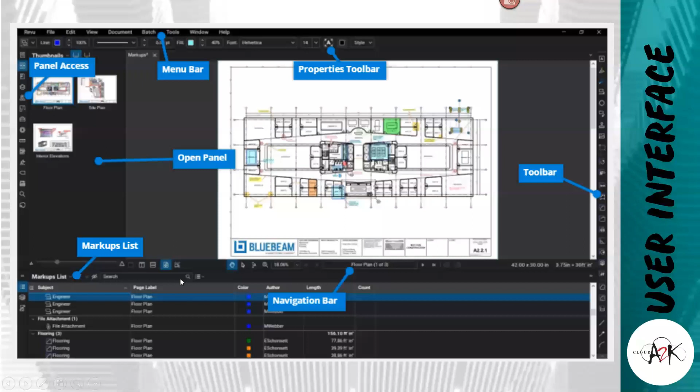That's the basic interface, which we all know. So you've got the panel access, menu bar, properties. I'm not really going to go through it from first principles, so we're more showing some tips and tricks, but yeah, I will show what the things are and how to use them as we go.

So it's a PDF system, so that can contain all the metadata. So even with 3D drawings and the like, you can put hyperlinks in there, bookmarks, file attachments. So you can put a lot of images in as well and hyperlink to those images. So it becomes a real good collaboration tool between the office and somewhere on site where they can put a photo straight into those drawings and then you can see the full site.

It does deal with 3D data as well, so you can create from Revit a 3D PDF. So I may show that as well.

So I've got a couple of tips from clients that came in. One from Scully Song Construction, Dennis Havworth there. He said that one of the great tips is with a programmable mouse. So if you use a programmable mouse, you can have all the buttons assigned to sort of redo, undo areas and perimeters and the like, and you can use the hotkeys to its full utilization.

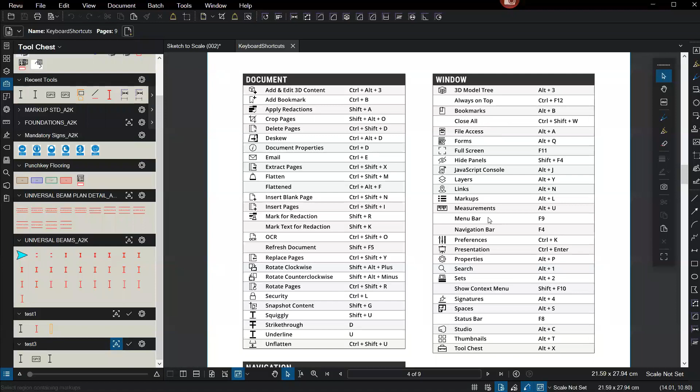So I will flip to Revu now. And if you do go under the help tab at the end, you will find that there is a keyboard shortcuts guide. So if you do use this keyboard shortcuts guide, you'll find it's got a lot of the keyboard shortcuts through there. So these are a lot of the inbuilt shortcuts, and you can assign these using a programmable mouse to what you want it to do. So everything does have a hotkey to it. So you've got all your sheet controls and document controls, all your window controls, going through to your measurement tools as well.

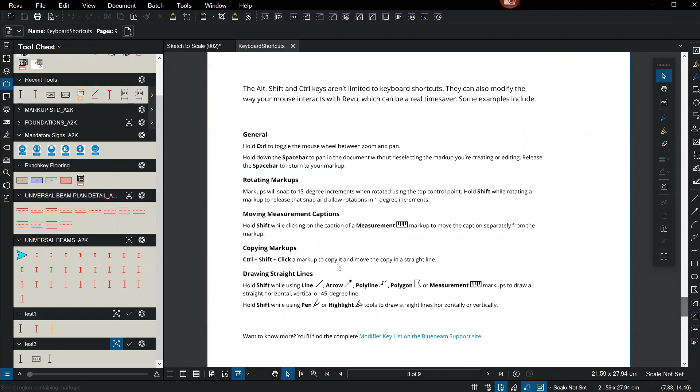So this comes straight from the Revu. These are the standard settings, and you can get that list through your help, under the help and keyboard shortcuts.

If you go through the tools and tab menus as well, you will see all the hotkeys are through here. Especially on your tools and markup tools, a lot of them use common sense ones. So P for pen, H for highlighter, Shift E for erase, L for line, arrow, etc. A lot of them are quite straightforward.

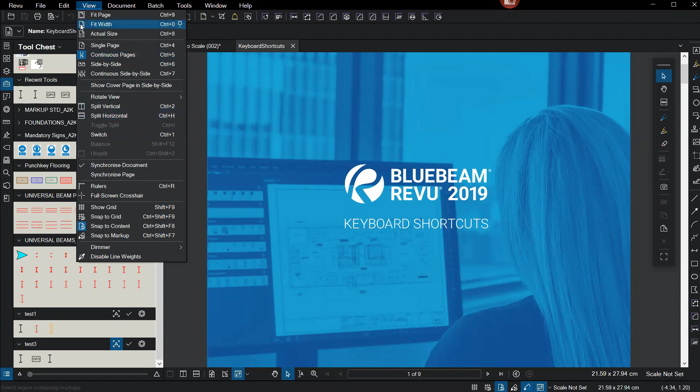You can see all the controls through there. So it's good to use the hotkeys to make yourself a bit quicker, and it's good that they're locked down to a degree. These hotkeys are generally available to anyone who uses your Bluebeam. They're all the same hotkeys, which makes it quite useful.

So that's just with the programmable mouse. It makes it a lot easier if you've got all those buttons on your mouse, and you can be more efficient that way.

Tip number 2, so I'm going to go through this a bit more in depth. This came from Tass Construction Group and Josh Jones. So you can sketch to scale.

A lot of people do use these items to actually draw full drawings in Bluebeam. But Bluebeam isn't a drafting software, like a lot of us are probably coming from things like Revit, AutoCAD and the like. It's not really meant to compete with them, because their number one job is to do the drafting tools.

So these are tools that are inbuilt in Bluebeam, where you can use them to produce sketches. You can produce title blocks, different items that you have, you can reuse, and it's all to scale and applying that scale. So we'll go through that a bit more in depth.

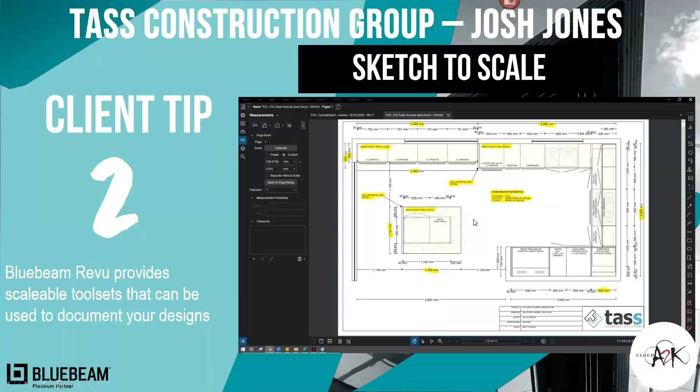You can see here as well where we've got all the items to scale. We've measured off perfectly, and all those items just work. So I'll now go through and show some of those in actual demos.

So I'm going to go to Bluebeam, and I'm just going to start a new project, so I can start a new PDF. We can put in templates as well, so if you create a title block sheet, you can save this as a template and have a sheet come up through there. But I'm just going to start a new PDF from here.

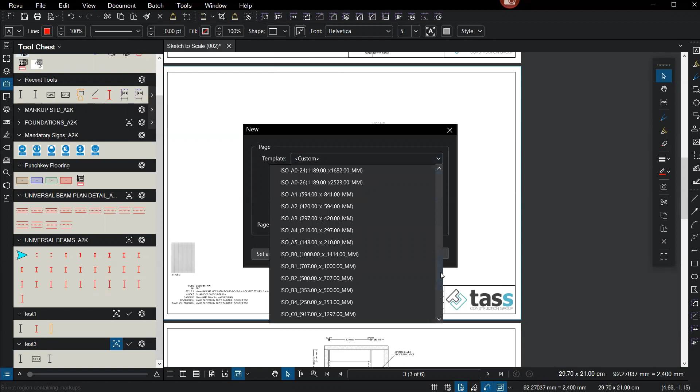And it will come up with our size. I'm just going to use an A3 sheet, so you've got the ISO A3s in there. You can change these sheets through your administrator, and you can have it as a portrait or landscape as well.

And that gives us our basic sheet there. Now, what we haven't done is applied a scale at all to this sheet. So this is the panel access through here, and the first thing I want to do is give it a measurement.

So I can calibrate this sheet and give it a 1 to 100 scale, with 1 centimeter set. So what I can do with this is actually start to draw, and draw to scale as well. Now that I've got this calibrated, I can use my tools here and use sketch to scale.

This will allow you to actually draw lines and use the drafting facilities in Bluebeam. So if I do a polyline sketch to scale, I'll see that if I drop that line there, I can give it a length, and that will be a to-scale length.

You can hold shift down as well, and shift will snap it to a degree. So you can see there, if I hold shift down, it will snap to that 0. If I don't, it has that free rotation, but it does still snap. If I hold shift down, it will snap to like the 45 degrees, so we can see there it's snapped to 45 degrees and 90 as well. Shift will make it snap around to those 45-degree angles.

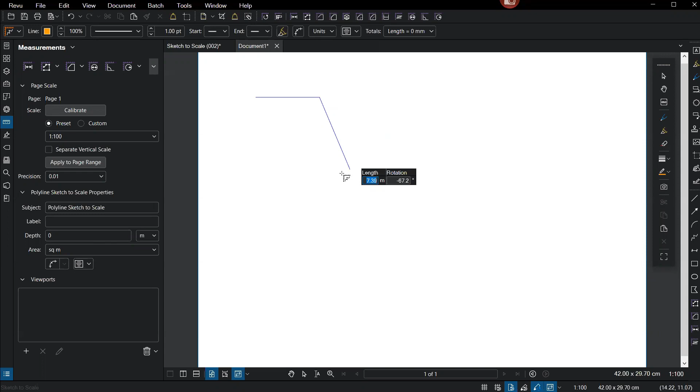And then you can start to draw something that's 6 meters long. Again, by holding shift down, you can snap it down and make that like 10 meters down. So again, it's just L for line, shift down. I did just use a plain line there, but you do need to use the sketch to scale tools, so from sketch to scale, you've got your polyline through there.

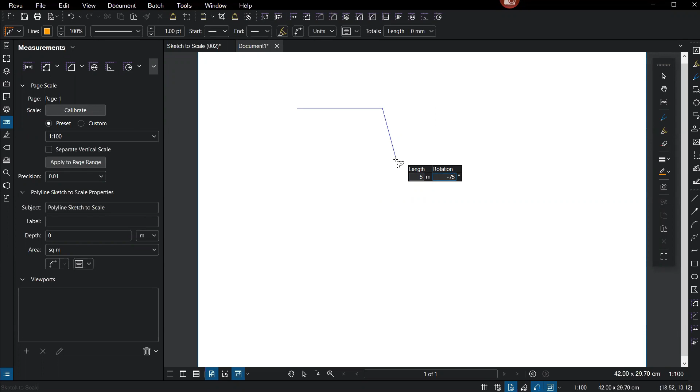And you can tab, so if you wanted to give it a real angle, I can see that that's snapped there to the 5 meters. If I hit the tab button, that will then allow me to make that minus 75 degrees. So you can see how I've got a line there that's come from that point, which is 5 meters at a minus 75 degree angle, and hit enter to finalize it. And that's put that line in.

I hit escape again out of that, so make sure that you hit enter instead of escape.

You can do polylines and rectangles as well. So if you did want to do a rectangle, the same sort of process works. You pick a point, it does stretch out to the different degrees there, and you can use those items to go 10 meters by 5 meters, and by just tabbing through and hitting enter, it will place your rectangle.

You can obviously change all that as well. So if you wanted it to be a blue box or a thicker line, dashed line, etc., or even through your manage settings put a stormwater line in if you wanted. Changing the thickness as well is all through here.

So that's how you can simply do something to scale. What you can do is use this as a full drafting tool. So what I'll do is make this a bit of a cupboard - sketch to scale, polyline again.

What I can see is I'm not really picking up a center line there, so what I may need to do is go into my Revu preferences, and make sure that my tools, when I go under sketch, it's under general and the snapping.

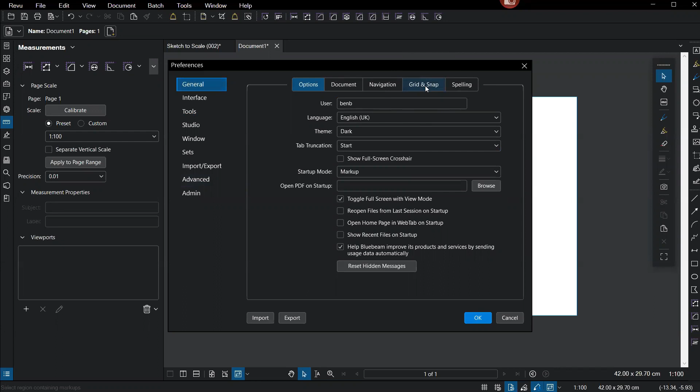I can make sure that we're going to snap to midpoints, snap to lines, snap to markup, etc. This is a markup because even though they're lines, it's not really content, they're more markups on the sheet, so I do want to snap to markup. I can see here I do have snap to midpoint selected and snap to endpoints and intersections. So what I need to do is actually snap to my markup.

So if I click that snap to markup there, that's where if I now go to do my polyline to scale, it will snap to that midpoint. I can see how it's picked off that midpoint right there, and I can snap it to that one.

Stop hitting escape and keep hitting enter. So again, sketch to scale, midpoint, midpoint, and enter - and that's put that line in. Again, sketch to scale.

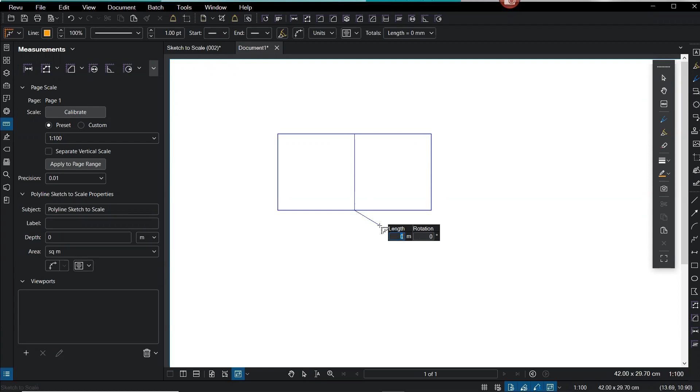You can also do ellipse and a circle. So again, I'll go through tools, sketch to scale, and get ellipse. And with this, again, you can see how it's sort of got that magnet in there, so it will snap to the midpoint.

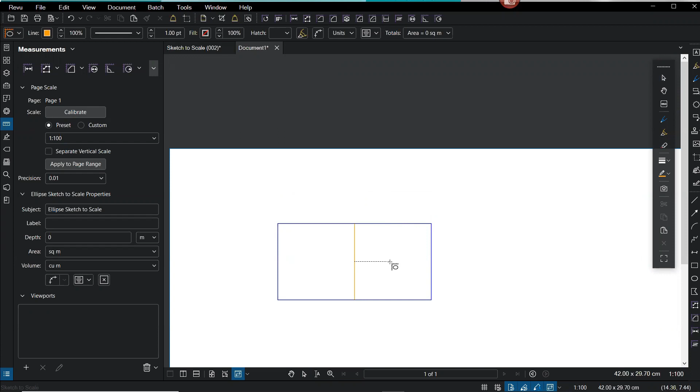And I can get a radius in through here, so that's where I can do an actual radius of 2.5 meters. The shift key as well works on that to sort of snap it between, and you can also get your tool in through there. So I can put that in there and enter. So what I can do now is easily save that to my toolbar.

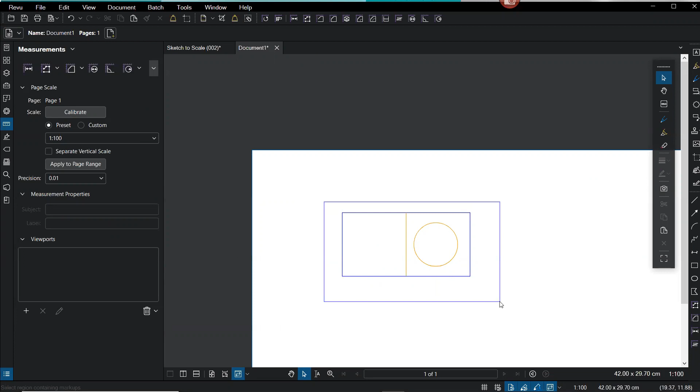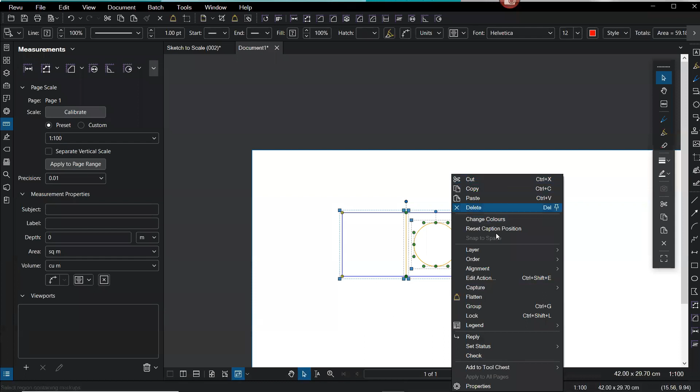So if I select all those items, what I can do is group them. If I right click, I can group those items. So one of the tips to use in Bluebeam is: if in doubt, right click it out. If you right click, you generally get all the actions you can do on this. So you can make a group of that, and I can right click and add that to my toolbar as well.

So if I add to tool chest, I can add this to my tools. And now I can see, through your tool chest, you've always got your recent tools, and I've just added that into my tools as well.

So to make a new tool chest, if you click under the tool chest, you can go to manage tool chests here. I've got a couple of test ones - I'll just deselect those, and you can manage a tool set. If you go in here, you can import new tool sets, export tool sets you've made up, and you can add and start new tool sets.

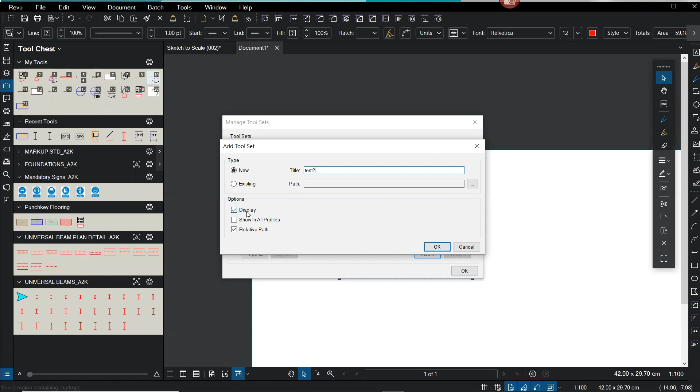So if you go to add in here, I can start a new one. Again, I'll just call this test 2. You can decide here if you want to just show it in all profiles. If I currently want to display this tool set, which I do, I put it in through there. So this is my test 2 tool set.

It asks me if I want to save location, so I'll just save this to my desktop and save. Okay, so now I can see I've got this test tool set here.

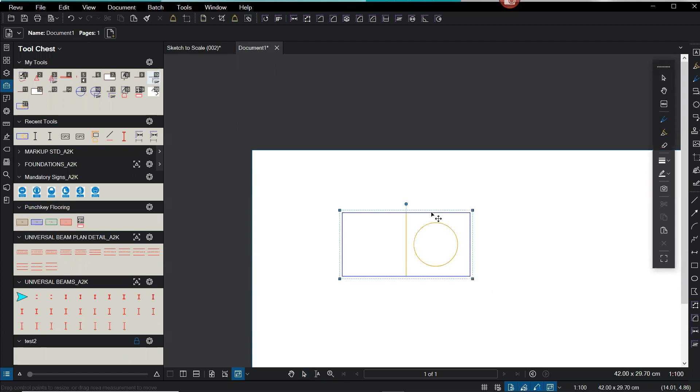Now there's a few different ways to add things into the tool set. One, I can grab the item itself, and as I showed before, you can right click and add it to your tool chest. And there I've got my test 2.

One of the best ways is always to go through your recent tools, and again, right click there, and you can simply drag and drop it. I don't have a lock on it, so I'll put a lock on, and there we go. So I've got that item now in my test 2 set there.

So now if I want to reuse that at any time, I can just bring that in.

Through the properties as well, so we have properties of each item. If you click on the item and go to the properties, so that's always the cog there, you can right click through, and you can start to fill in this data.

So you can give it a label if you chose to, or get an area, etc. And with the label, you can change the units, so I could change that from square meters to square centimeters if I chose to, or whatever, all through here.

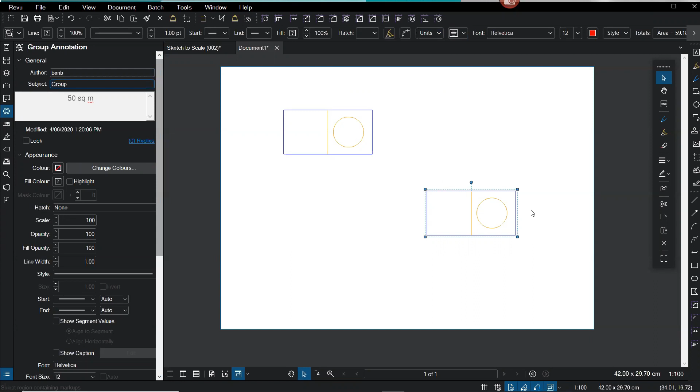And that's the group, so these are lines in a group. These aren't area dimensions or anything, they are just lines that have been sketched to scale.

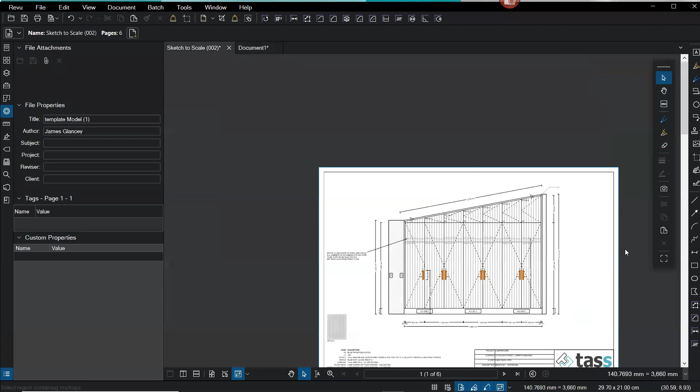So what I can do now is I can go to a new drawing. I've got this project here, which came from that TASS construction group. And all these items have been generally drawn in Bluebeam itself, so they've got all the text that they've used, their line styles and their handles, and they've all come in through there.

So what I could do is if I went to my tool chest now, the first thing to do whenever you open up a drawing is to check the scaling of it. So always go through your measurements, and you can calibrate the job.

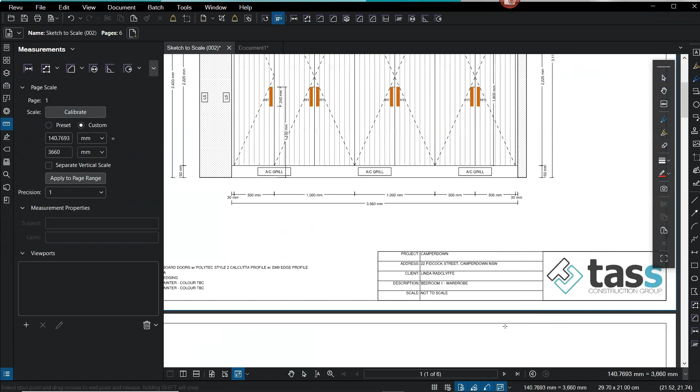Now, when you hit calibrate, you do get the lines where it will snap to the content. We can see here, this doesn't have an actual scale set on that. So you're always better off to look for the longest dimension you can find. I'm going to go off this 3.1, I might go 3.5, that is a fraction longer, so obviously the longer the line, the more accurate it is, and I can select that point.

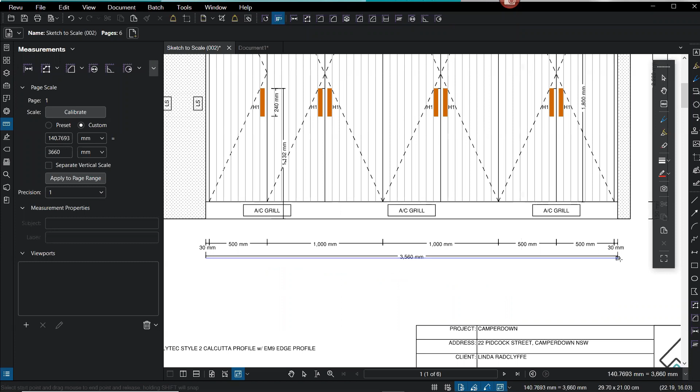Select this point at the end here, and then I can make that. So it has measured it off as 136 millimeters. And I'm going to put in here that it's actually 3,560 millimeters, and apply that scale.

And now that I've applied that scale to that job, again, if I go to my tools and sketch to scale, if I do my lines, I will see that they will fit in.

So I'll just go here, and just to show how it works, I'll do a line from this point, and if I do that 500 mils, we can see that that will be the right length. So that's put that in at exactly 500 mils, so we can see how that sketch to scale is working already.

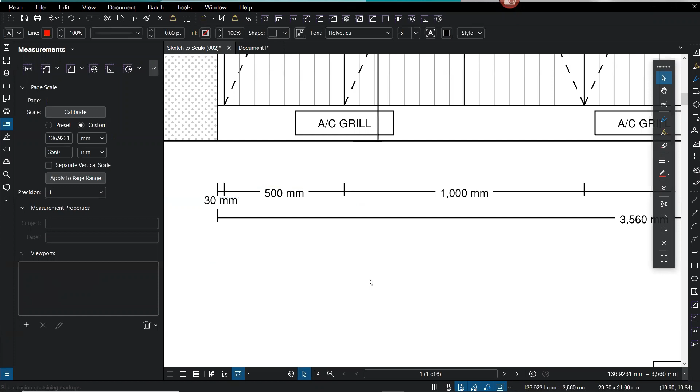And if I go to my tool chest, what I can do is actually apply a scale or set a scale to this. So if I bring that in now, we can see that's brought that in at the right size.

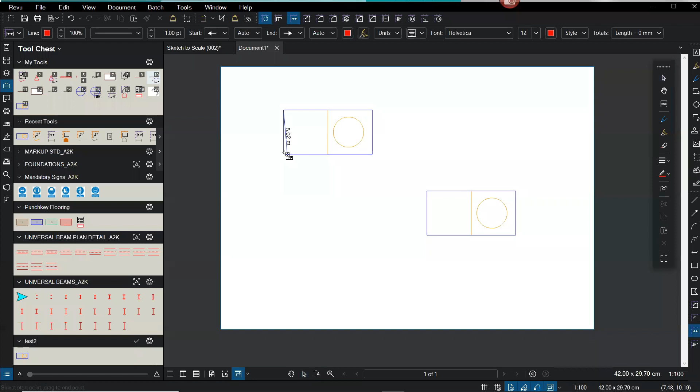So I'll go back here and I will check that dimension. If I just do a measure, it's 5 meters there, and we can tell in here it's brought that in miles too small. So that's actually 5 meters long through there, so we do need to apply a scale to this.

So that's where we can set the scale.

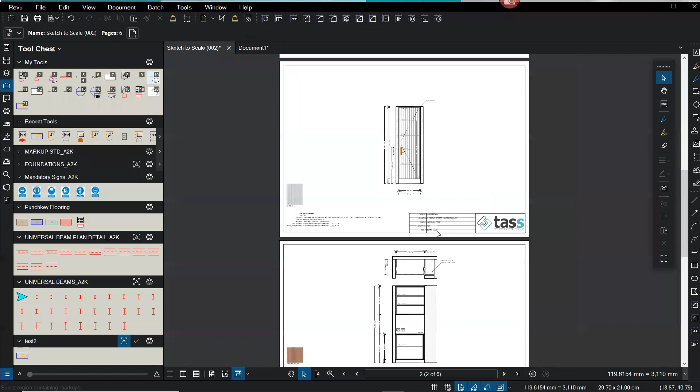And if we now input that or calibrate that scale again, and now if we bring that in, let's grab the scale. We can set different viewports on the drawing itself. So these are all at the one scale.

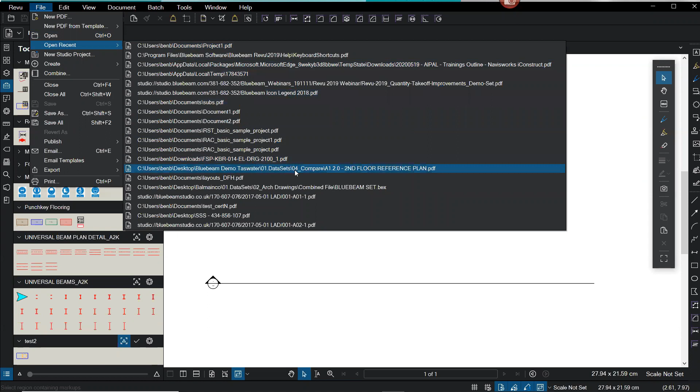So if I open up one of my recent drawings through here, if you do have a heap of scales on a different sheet, you can put viewports on. So if I had this at 1 to 100 and I had another scale down here at say 1 to 20, I can add different viewports to the sheet.

So to do that, you go through your measurements here and you can add a viewport. So this calibration has stayed on this whole sheet here, and I can apply that to a page range as well. So I can say that I want that selected to all pages. And I can also add different viewports.

So if I add a viewport here, it will come up and it will ask you to define a region for that viewport. So say if I had an area in this corner here, and you could make that go to a preset scale of 1 to 100 or 1 to 10 in that corner and apply.

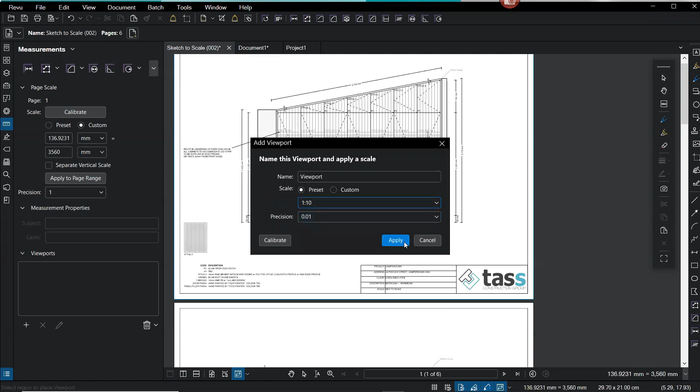And then, so that sheet there now has 2 scales to it. So the general sheet, when I measure here, you'll see that it will come up as, so what I'll do is if I do a measurement here again, that will come up as a meter.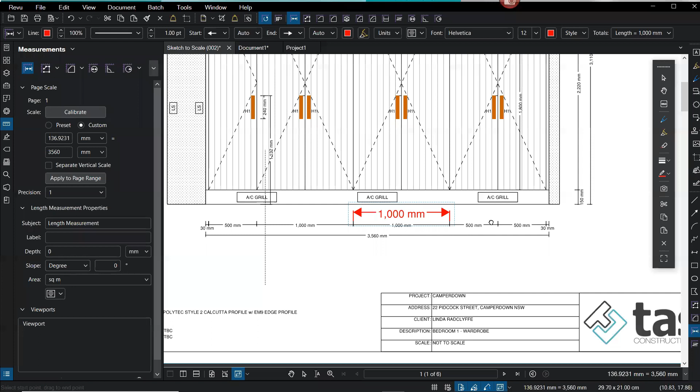And if I do a measurement in here of about that distance, we can see that that's coming up as a lot smaller. So even if I do that as a bigger dimension, it will pick up the different scale through there.

What you can do is bring stuff across quite easily from Revit and the like. So in Revit, this is a Revit file I've got here, just a simple Revit file. So I've got all my columns in there. So you can use this to bring the different columns in. So you could bring in like a 310 or a 360, bring those 2 columns into Revit.

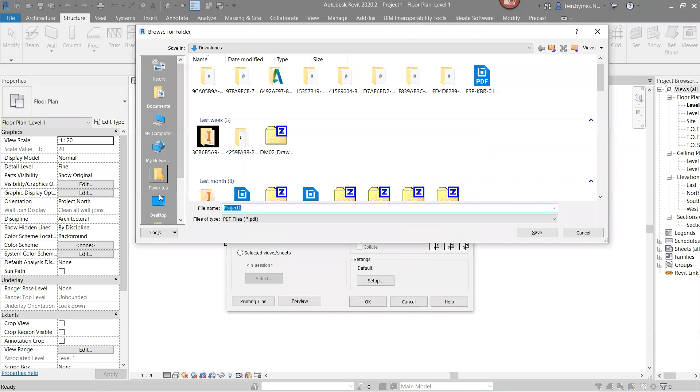And then from here, just by printing to your Bluebeam PDF. So through that, and I'll just put that to my desktop.

What I will do is I will set a scale on this. We probably don't really need to because we can set the scale always in Bluebeam itself, but it's a good idea just to set it through here as well. So I can put a zoom in here and set that at 100%. I'll center that as well.

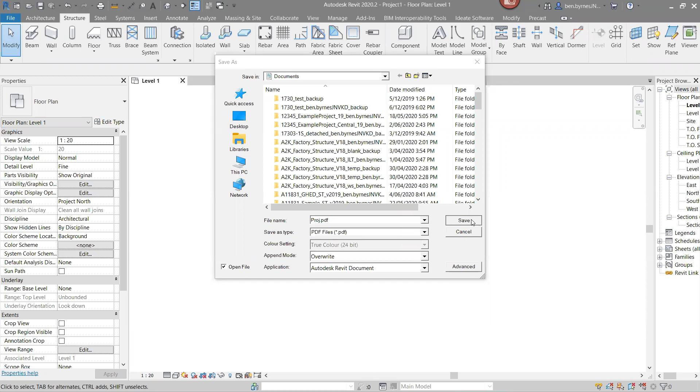I'll save that to my desktop. And I've got that set through my administrator that it will open straight up. Obviously, when I printed it, I'm on a bad sheet size and haven't really set the scale. So again, I will just print that again and print it to fit. So current window set up and make sure I just fit that to page. So I'm not too worried about the scale in here because I will sort that out in the Bluebeam itself.

So now I can see I've got those two members in there. If I did a measurement, say this one here was a 310 UB, I believe, I'll just check that. So 360, and the distance of that is 360 mils, 359. So I've got this in here.

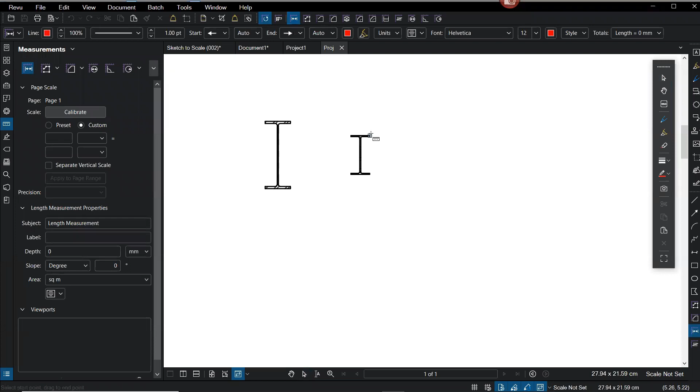So when I go to measure that, you will find that it will ask me. So it's coming here at the wrong scale. So you can see that whenever I go to do a dimension, it does come up with that warning that you need to calibrate the drawing.

So again, I will calibrate this, grab that distance and make that 359 millimeters. And apply that, and I can see that that's grabbed that right size now.

So now that I've got that, what I can do is I can grab these items straight out. So by using G, which is our snapshot, and again, that is also through tools. So you do get it through there, just that drop down snapshot. And I can grab that beam through there.

If I go back to my sketch to scale, I can paste that item in. And what I can see is that it hasn't come through at the right scale.

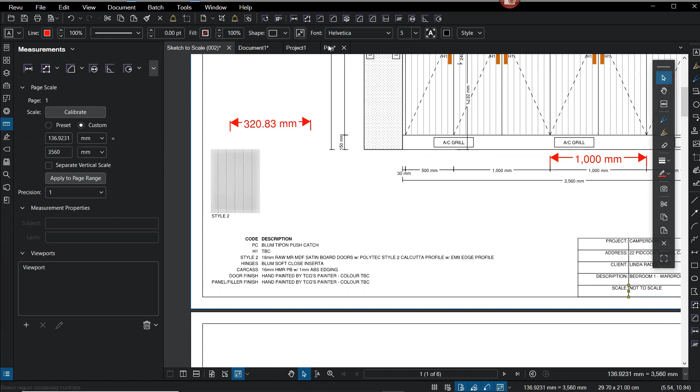So what I want to do is when I go back to the other one, so if I go back to project here, when I go to my toolbar, I'll see that I will be in my recent tools here. And what I can do is add that to my toolbar. So if I drag that on,

then I can select it, right click and go add to tool chest. What I will do is I will quickly just make a new tool chest. So if I go under tool chest and manage, add a new tool chest. I'll call this columns.

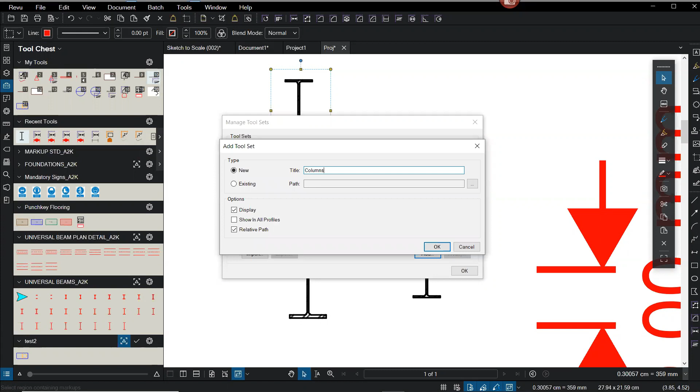And okay, now I can add that to my columns tool chest. So I'll see now I've got my beam in there.

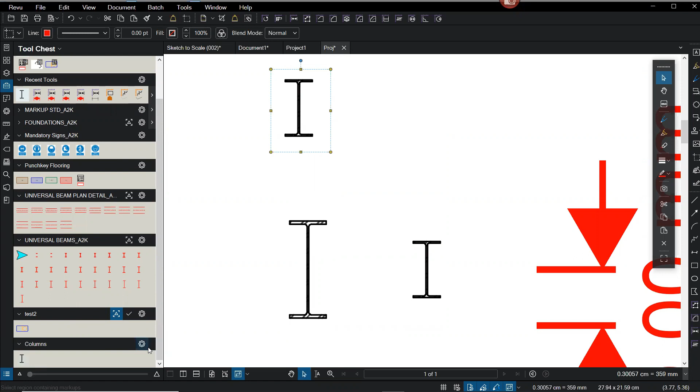So if I now set a scale on this, what I do is I go to the project, and then I can set the scale. Oops, I'm in the wrong project. Go in here.

I can calibrate this scale to the correct size. Yeah, I've sort of gone around a bit. And you can put all these items in. So once you do get the sizes there, you can have all your beams and plans in, so you can draw like plans and beam details.

And it's a good idea at this stage, when you change it, to change it to a detail. So if you change that to detail, then through the name of the object you can have all your sizes through there, and the same with your universal beams through here. So if I change that to a detail, I can see that I've got all the correct sizes there.

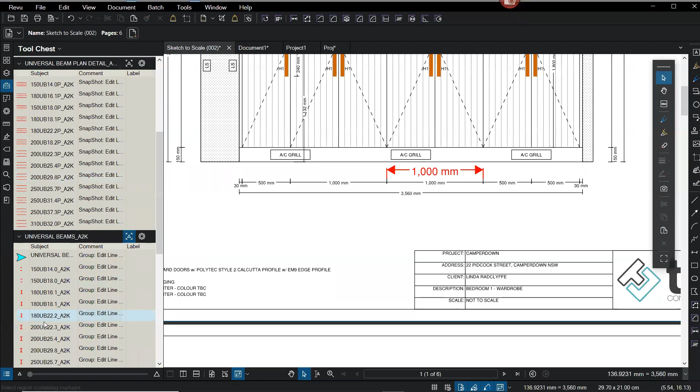And then I can bring these items on. So I've got a 180 UB there, which I can put on, and I've also got a 310 UB 40. So if I place those on, you can see that they're coming on at the right scale.

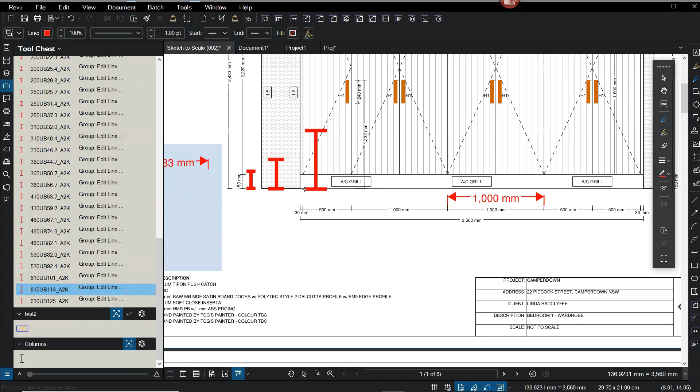So this is where you can quite easily create a to-scale construction drawing. You can then use these as well to do like basically a simple sketch to scale, where you may have a beam coming onto a column.

You can use all those features through there. So you'll see if I measure those off now, that they'll be the correct scale.

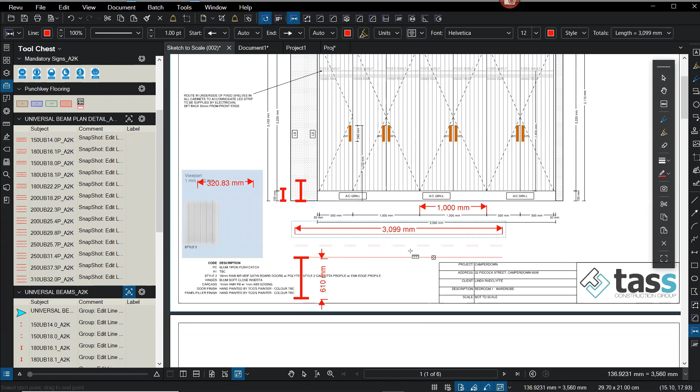And through there. And remember, you can always hyperlink. So with an item, I can add an action to an item. So what I can do is I can select this beam, for instance, and I can put an action on that, and I can hyperlink that to a catalog or etc.

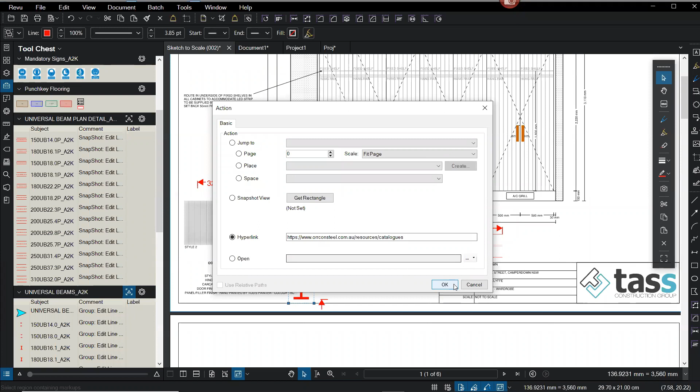Of that steel member, so I'm not going to do that now, but if you had the steel catalog, you could go here and you could point it to that exact catalog. So by grabbing those data sheets or those building products, you can grab that catalog, put that in as the hyperlink, and then it will come up with that little action symbol, which you can then follow through to that website.

So you can do that for everything. You can also hyperlink to sheets and details. So what a lot of companies do as well is when they have the plan and elevation, you can hyperlink those items by putting in your text or your label.

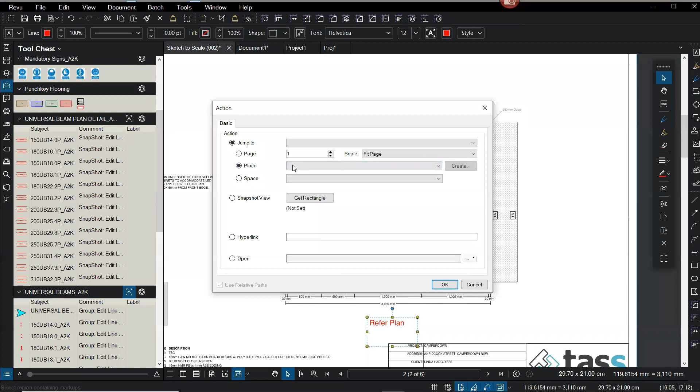So I'll just go to markup and text box, so I can have that set there as plan. And again, I can select that and hyperlink that. So edit action, and I can point that to a different page, so I can have that jump to page 1. I think because I'm on page 2.

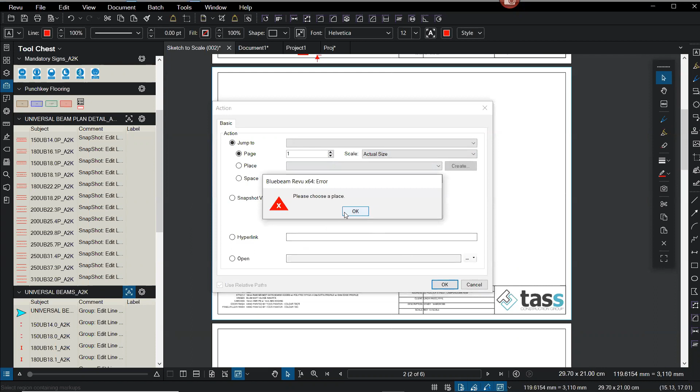Yeah, so I need to create a place first. What I will do is I will jump onto the chat for a bit. So I have seen some questions come in.

Can you create a BOM from the hyperlinks? Yeah, I don't really, the question there, so you can create a list from it. You'd probably need to go through the markups down the bottom here and get those, to create - I think you're more saying like as a shop detailing thing.

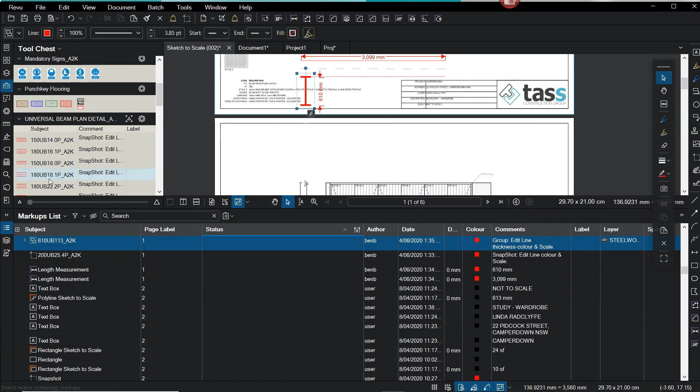So with bringing in these beams, they do come in as items, so you can get these out. A bill of materials, you could get a count of them. So like for each one I put on, say if I did place another one of those, I'll just go here to place another steel beam. So if I place a 180 steel beam there, you'll see that they're coming up in my markups here.

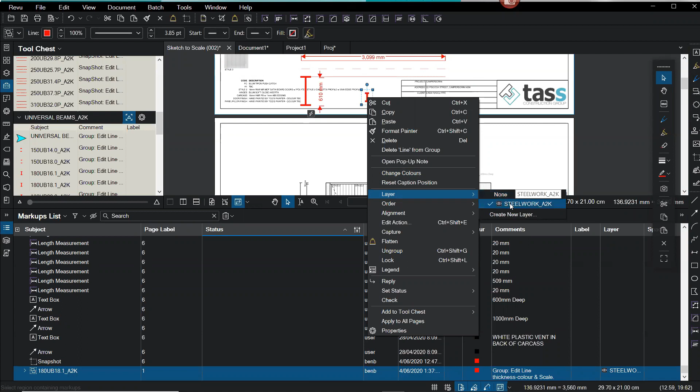What you would probably want to do is add them to a layer. So if I right click, I can put these all on a layer. So you can use these sort of as per, almost like an AutoCAD layer. So all those, they've gone on the steelwork layer.

So what I can do is I can then filter my markup lists, so you could really sort of trick it a bit and make sure that I only saw the steelwork layer ones, and that would give me like a very rough sort of bill of materials and a count. So again, if I do pull in like another 610 UB 113, I'll see now that I'm getting - I'll put that on the other page.

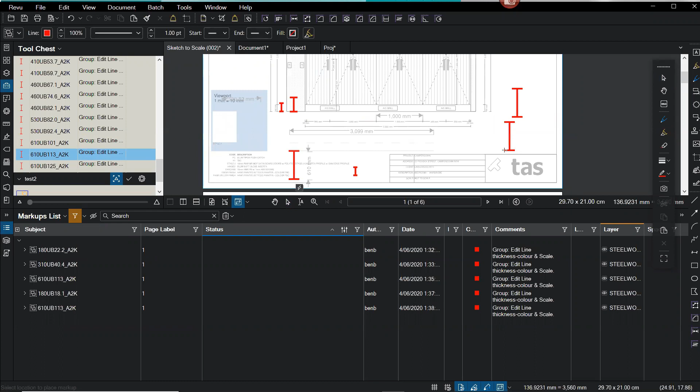That's why it's come there on the page, but you would need to sort of play with the markups and actually mark off the counts. You can see if I did put in another 310 or another 610 UB, it's actually created two separate ones, like they're two of the one. It's not really doing that count as such because they are separate markups, so as I add each one in, it's not really counting them. But if I exported that out, I could get it to sort of show as a count, so it'd be quite rough as a bill of materials.

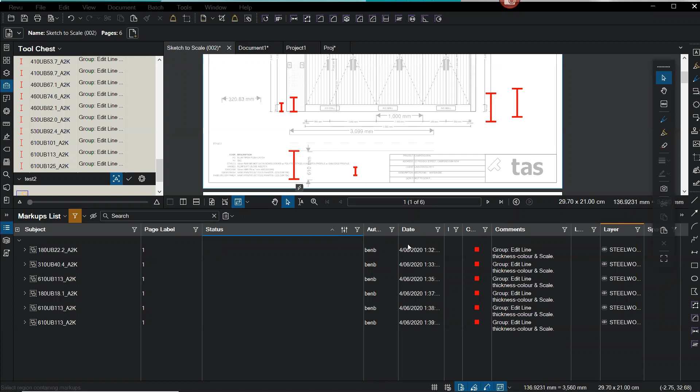You can isolate stuff through the markups here by filtering your markup list. If I take those filters off, you get every markup that everyone's put on. Through your markup list at the bottom, you can jump to every item as well, so you can see where people have done certain sketches and the like through there. That's where it's a good idea to use subject, status, and all these features through the markups list, which you can change these columns as well. Any data you wanted to put in, you can make custom columns, it's all through your columns, and you can select what you want to show.

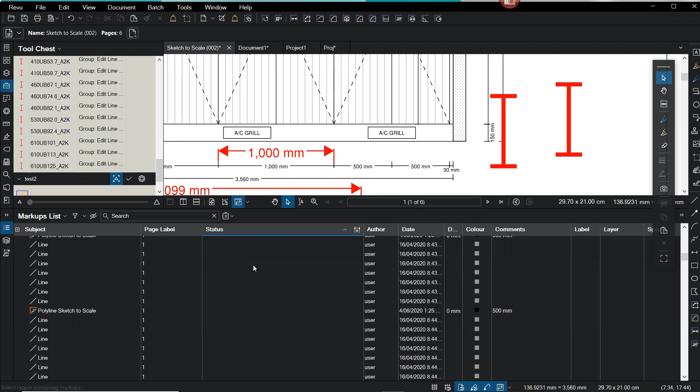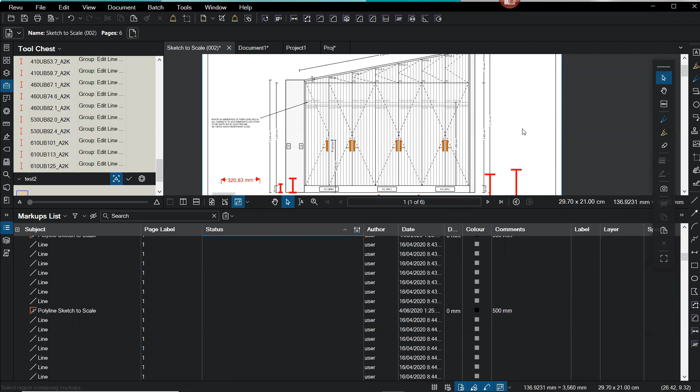You can also manage these columns and make new columns, even custom columns with formulas, using simple Excel formulas through here. That's a good way to do areas - I won't go into it here - but that's where you can actually assign dollar values to different areas. So you can assign a numerical value to an area. For tiling, you can have it as $2.50 a square meter, which is pretty cheap. So you could have that as your area and then have the count through there where it would times out the area and give you a value. That's where a lot of people use this for quite comprehensive quantity takeoffs.

Yeah. So yeah, I wonder if there's a few questions in the chat as well. Some people are using chat.

So yeah, dockable menus, yeah. So you can, yeah.

So yeah, just with the sketch to scale on a drawing PDF, yeah, you don't really need to apply the template to it. Do you apply the template to it prior to sketch to scale? Yeah, so you do need to just set that through there.

So yeah, what you can do as well is through the documents, what a lot of people are doing now is setting up dashboards and the like. If you set up a dashboard, you can then use those hyperlinks to point to different items over there. So to do that, I'll show a quick way to hyperlink to stuff in a set.

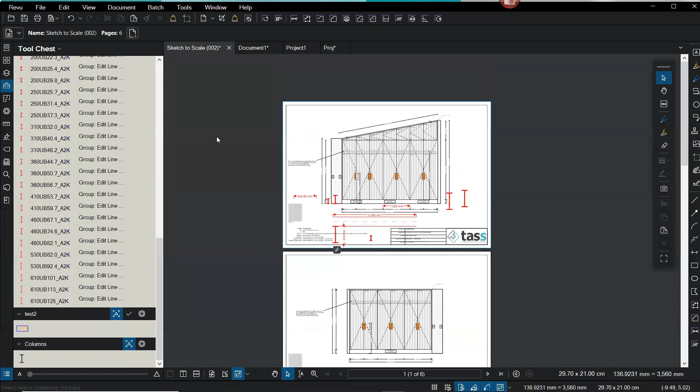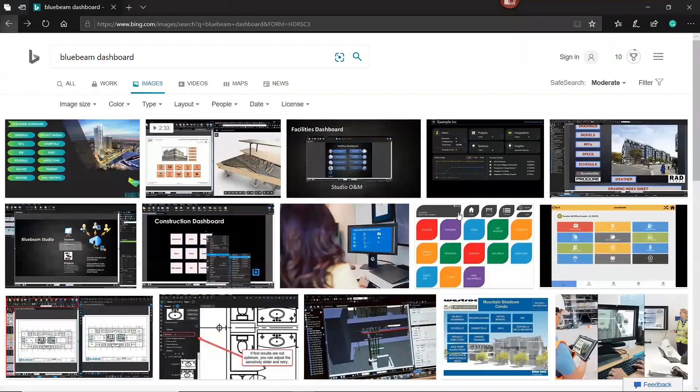You can use like PowerPoint or the like, or get a simple image, and from then you can hyperlink areas. So I'll just open up an image that I have. If you search, if you've got 'Bluebeam dashboard image' or go to something like that, there are a lot of ones you can just get off the internet. If you go to images, you can get a digital dashboard - I won't use the Lendlease one - and you can simply copy and paste that dashboard.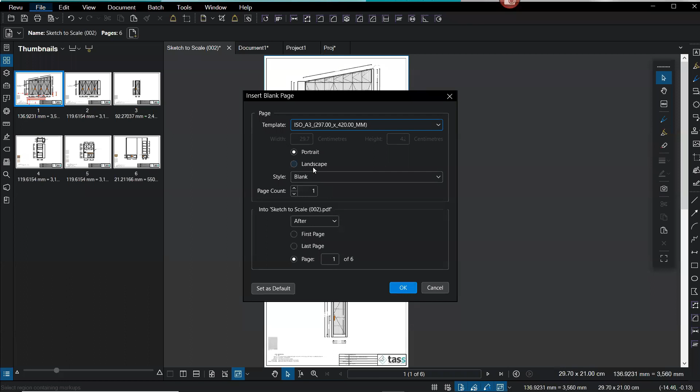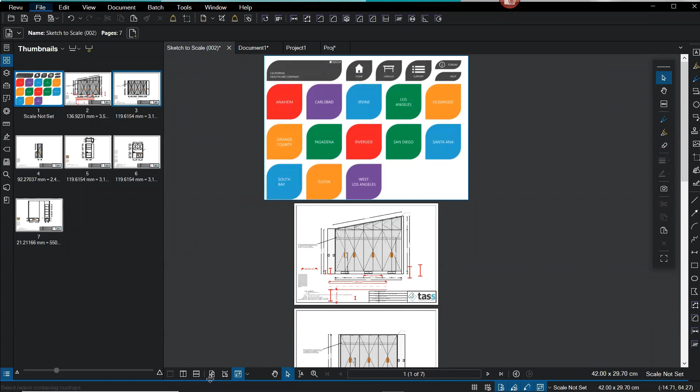So if I now paste that onto a new sheet, I'll go to my sketch to scale project here. What I can do is at the start, add a new sheet, insert a blank page, make it A3 size, landscape, and okay. I can move that - going through the tool thumbnails here, I've moved that to the front page. I can put on my dashboard here and size that to fit, and that's now become my front page there.

You can use this as a simple hyperlink area. What you can do is go to your tools and go to hyperlink. We're not really selecting the area because this whole image is part of the image, so if I right-clicked and put an action on this, that would action the whole area. What I want to do is actually action specific areas on this. So if I go to tools, then hyperlink, it will come up with a little crosshair so I can make that go to a certain area. So I can grab that area there, so that I want this to jump to page 1, and okay.

Or I can, so that will take me to that area on the page. You'd obviously probably want to point that to a different sheet.

So if I went to tools again, markup and hyperlink, shift and H for hyperlink, you can grab different parts of the page, then hyperlink or open a document as well. So you can path it to open a new folder. This is where you can use Studio Project to link it to a new folder or a new file and point through to a set of documents.

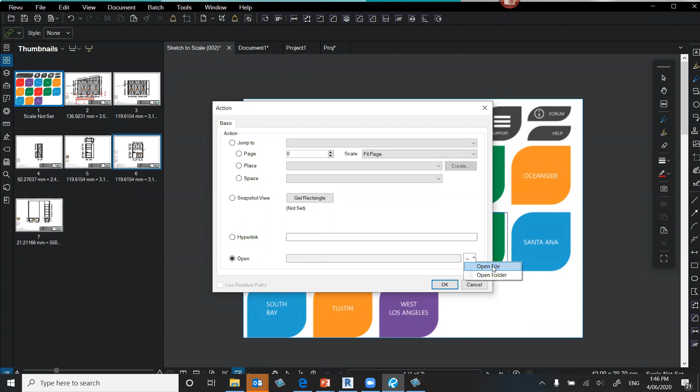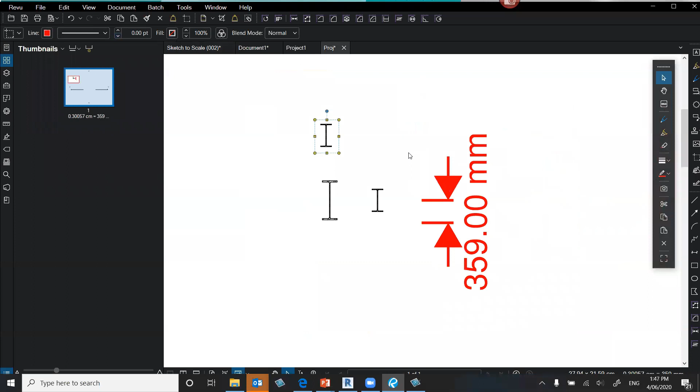So I can get that to point to my... then if I select on that, that will actually open up that project. So it's quite a good idea to have one of these set up for your project where you can have it pointing to different documents and the like through your Bluebeam.

So that's dashboards, and you can use anything, you can make up your own image. You'd set that up and have your project home catalog, point stuff to the forum as well, and to a help, you may hyperlink that to your intranet help, and you may also have links to the project as a whole. You could link to photo sites, etc.

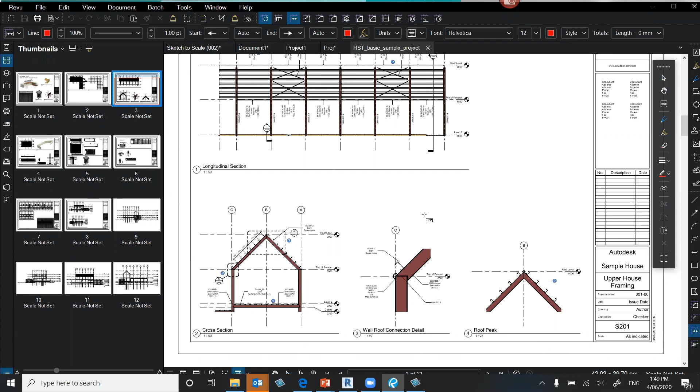So this is just a drawing that's coming from our set, it's the Autodesk sample. What I can see is I've got a few different scales here, and no scale set through the thumbnails. So as soon as I go to do any dimension, it's going to ask me straight away what to calibrate, and let me do the dimension. So you want to find out - I do have a scale there, but I can't really trust it because these may have been printed out too big or too small.

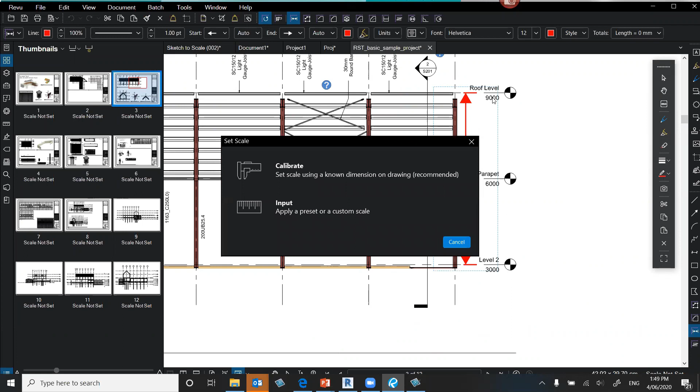So if I do a measurement from there to there, I know that I'm going from 3 meters to 9 meters, so I can calibrate. You do get asked that straight away, and I can put in 6 meters and apply that scale. So that's applied that scale to this whole sheet.

So if I go to something that's at a smaller scale, I can see that's at the same scale, but if I go to 1 to 10, again I can do that measurement on it, and that's not going to be an accurate measurement. So it's come up saying I've got a meter square wall, which it's obviously not. That's where you'd have to apply your viewports.

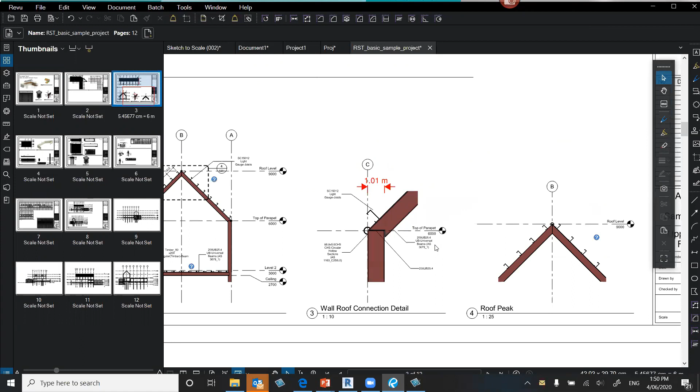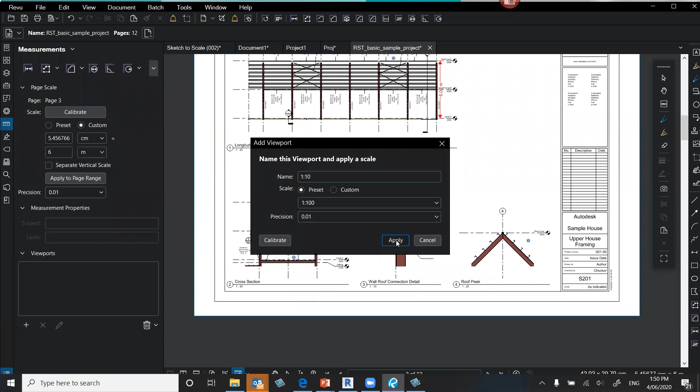So to do that, it's all under the measurement tab under the panel access, and you can add a viewport, define these different regions. So I'll put in there 1 to 10, but it's not going to be a 1 to 10 scale, you'll find.

So in there, I haven't calibrated that one, so that's where you'd need to get a measurement across here, or something you know of. If I used one of the preset ones, and made that 1 to 10 and applied that scale, I can see how that's actually updated that size - it's coming off nearly 100 mil through there. And then that's all about.

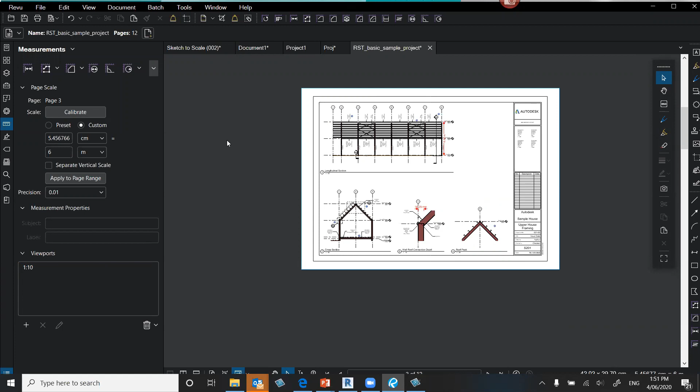So it does remember these viewports, and sometimes you can get too many viewports over the one drawing. So you may need to come in here to your calibrate and clear those viewports. If someone's done them incorrectly, you can clear all from document.

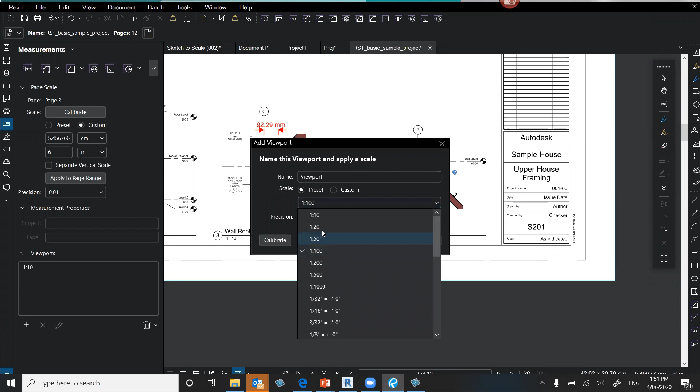So I can add another new viewport for this region here, which is even smaller again, that's at 1 to 25. And obviously I can't get the 1 to 25 there, but I can go to custom and go 1 to 25.

And now I've got the different viewports on the right, and it remembers them all. So anywhere you do a dimension, if I do it here, it's going to get it at 1 to 100. If I do it in here, it'll get that scale. And if I do it here, it's at the 1 to 10 scale. So that's where I can see it's applied across all those viewports over the project.

So, someone's asking, when layering, is there an easy way to select multiple items?

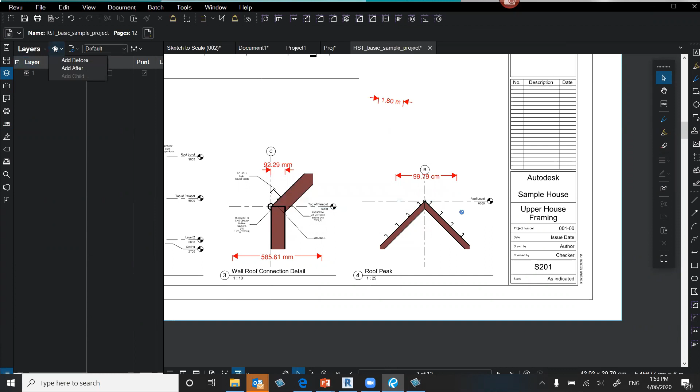The easiest way to do it is to select those items. So what I can do, I'll go in here. This drawing currently has no layers on it, so I can add a new layer, before or after. I'll just make them simple, call one '1' and make another one called 'dims'.

And it's a good idea to always use your markup list down the bottom here. What I can do is simply hold Control down, or Shift down to add. Control will select the next one, and Shift will add items in.

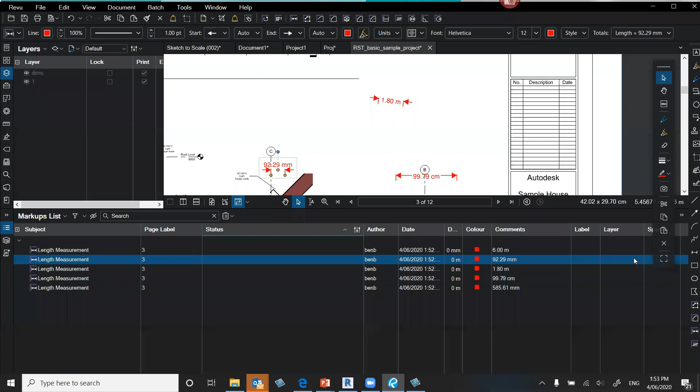So I can select all those and right click, select all those, then go through your markups list down here and change the layer. I can select all of them, right click down here, and change my layer to the dims layer.

And once I have them on that layer, I can also turn them off reasonably easily. So I can turn that set of dimensions off through that layer. It's just a matter of grabbing them all through the markups, right click, and change layer.

You can change them individually too, and it's always good to go through your markups list down the bottom. That's an easy way as well — you can see who made the changes, where they are, the dimension, and the comments on it. You can also jump straight to each one through there, and as you select through, it will select each of those dimensions. That's another good way to get to them.

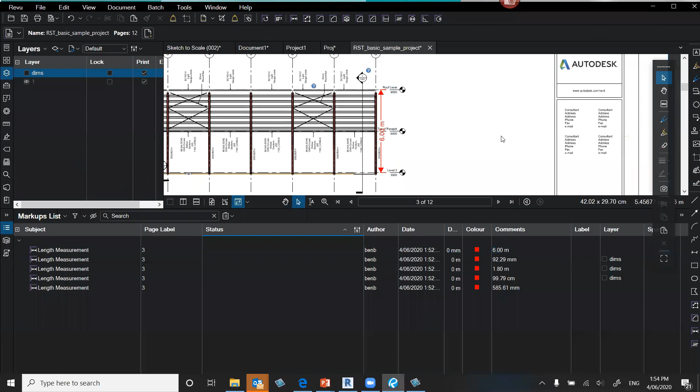And we do have... I'll just check the chat again. I think that was pretty much it on the questions. So that's it for the demonstration today.